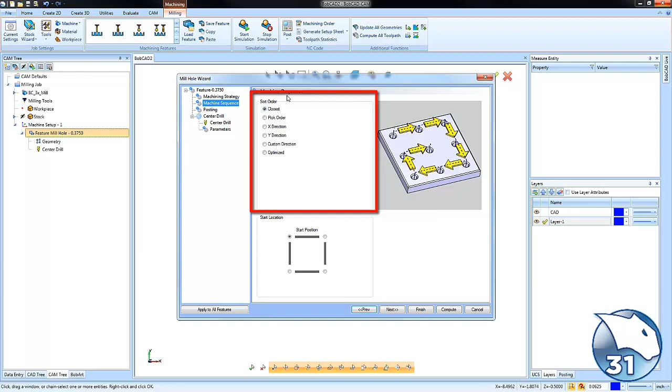So let's take a look at a few of these. The first one is set to closest. We'll recompute, and you can see this is the hole-to-hole movement that has been created based on a closest algorithm. This pattern may seem a little bit like Pac-Man, but that is what we get with our closest order there.

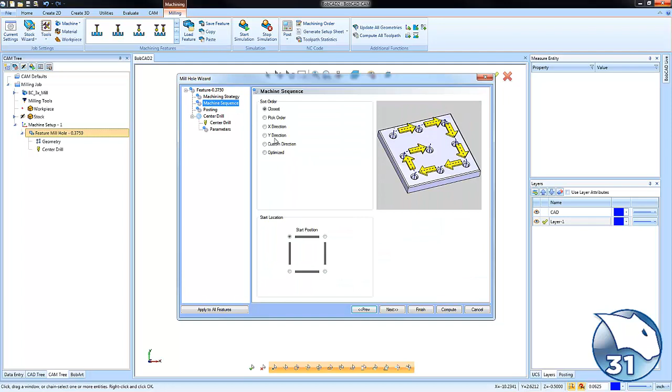Let's go ahead and edit our feature again and go to the machining sequence. This time we're going to choose pick order. Pick order is a really cool feature. You can choose pick, and this allows you to go through and cursor over the holes that you want to drill in the order that you want to drill it in.

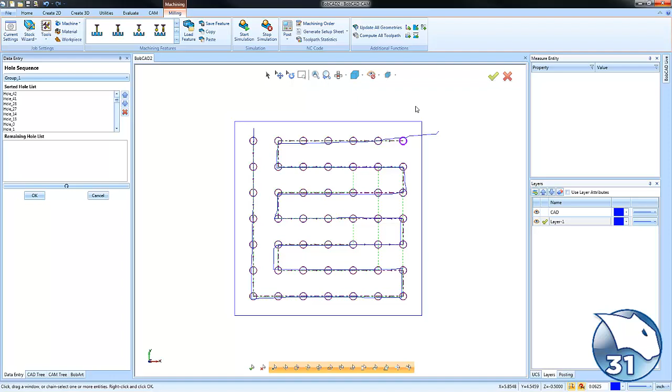This can be a very powerful feature when you may have some clamps that you need to jump or some other fixturing that may be in the way, so you need to drill in a specific order. You just window over with your mouse the pattern that you want it to go in and recompute, and you can control that pattern specifically just by the order you select those holes in.

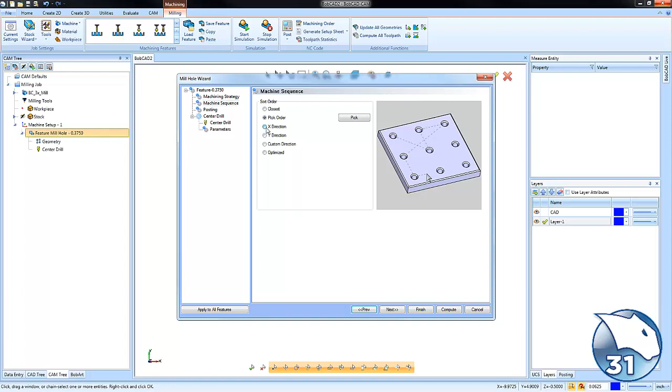So that one's a very useful feature, especially, like I said, when you're trying to jump clamps or you need to stay away from certain fixturing. The next one here is X direction. This will cut in the X direction. Right now you can see this is in a zig pattern, so it cuts in one direction.

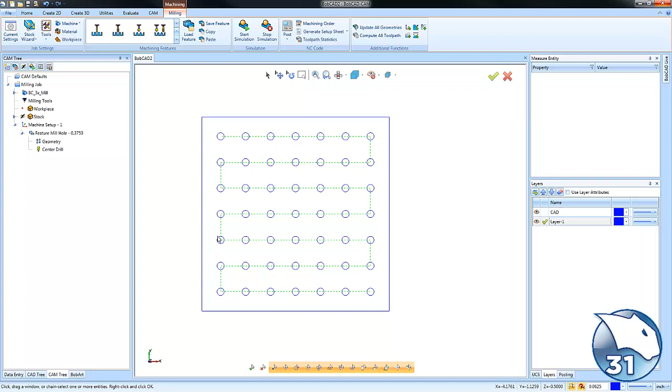But if we get in here and we edit our pattern to zigzag, we can get this to cut in a bi-directional pattern. So it'll start on one side and work its way back and forth. If you don't want it to cut along X, you can also set this to cut along Y. So this way it will repeat the same process, but instead running in the Y direction versus running in the X direction.

If we go back and edit our machine sequence again, there's a custom direction. You may want to put this on a specific angle depending on your part geometry. So we'll put that on a 45 there, and you can see it will cut these holes in a 45-degree pattern.

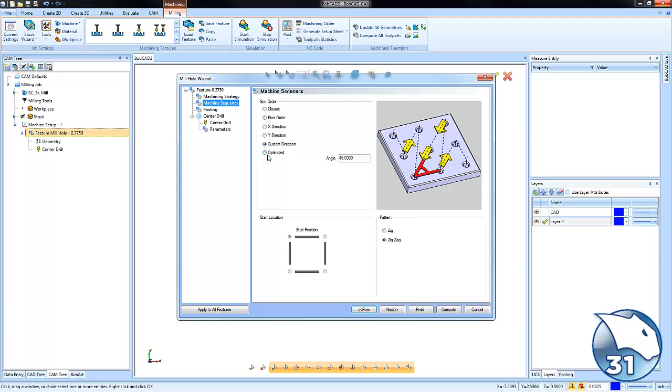Now the last one that I want to take a look at is this optimized. The way the optimize works is it looks at closest, it looks at X, it looks at Y, and whichever one gives it the shortest distance or what it considers the shortest distance is the one that it goes with. And that in this case looks like this Pac-Man routine here. But again, it's just an algorithm.

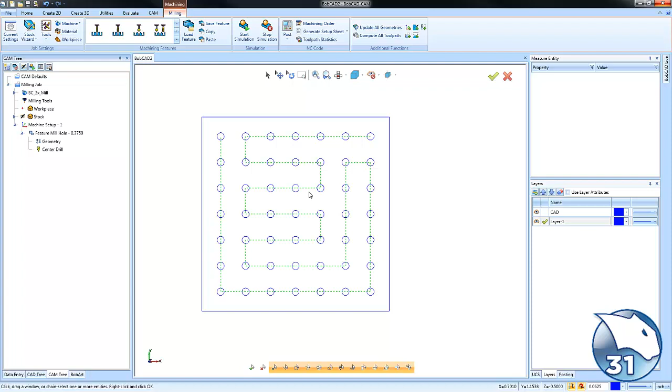So X direction, Y direction, your own custom direction, your pick order, every which way you would possibly want to sort these holes, you can do so. Again, just by editing the machine sequence and the sort order control.